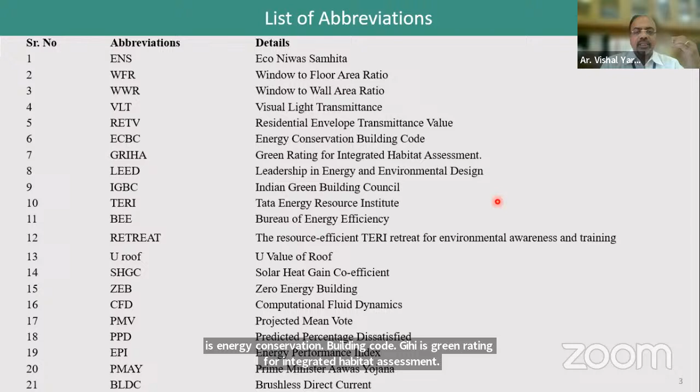ECBC is energy conservation building code. GRIHA is green rating for integrated habitat assessment. LEED is leadership in energy environmental design. IGBC is Indian Green Building Council. TERI is Tata Energy Resource Institute. BEE is Bureau of Energy Efficiency.

I will just read out the most important ones. U roof is basically the U value of the roof, and EPI is Energy Performance Index.

RSE is exterior film resistance. RSI is interior surface film resistance. PF overhang is basically a projection factor related to the overhang. H overhang is the horizontal depth of external shading projection. V overhang is the distance from the bottom of the sill level of the window to the bottom of the weather shed. W stands for windows, D stands for doors, V stands for ventilators, and so on.

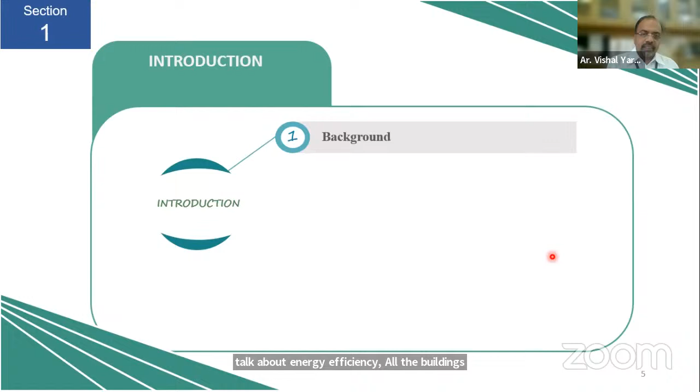Coming to introduction, basically when we talk about energy efficiency, all the buildings designed prior to the invention of concrete in India were energy efficient. But in the process of following Western countries, over a period of a few decades, the issue of energy efficiency was given least priority.

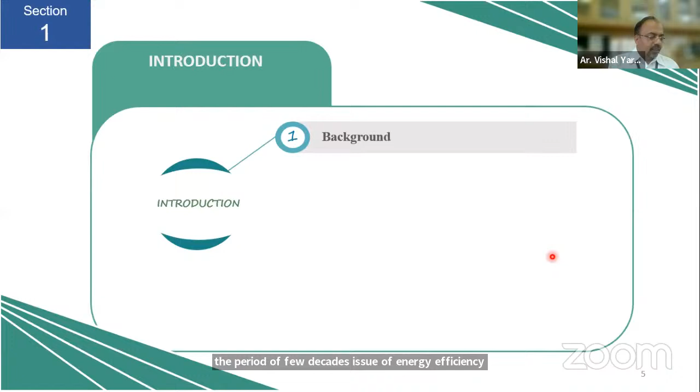The green architecture movement began in the 1980s for single houses and small scale buildings. In 1990, the United Kingdom introduced the world's first green building standard, followed by the US Green Building Council in 1993. After 2000, it was realized that we must address this issue, otherwise future generations will be in trouble. Then systems like GRIHA, LEED, IGBC were developed.

They worked on various working systems, various rating systems for energy efficiency and different kinds of energy audits. TERI has illustrated many principles of energy efficiency through examples. Coming back to the need, the cost of energy is increasing and the energy crisis is an imminent reality.

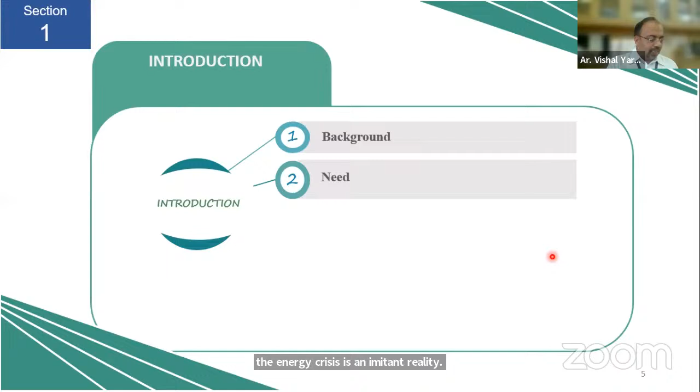So the need to provide energy efficient building designs is very important. You may talk about United Nations Sustainable Goals, Niti Aayog goals, various strategies of government which clearly demonstrate the urgent need of energy efficiency in buildings.

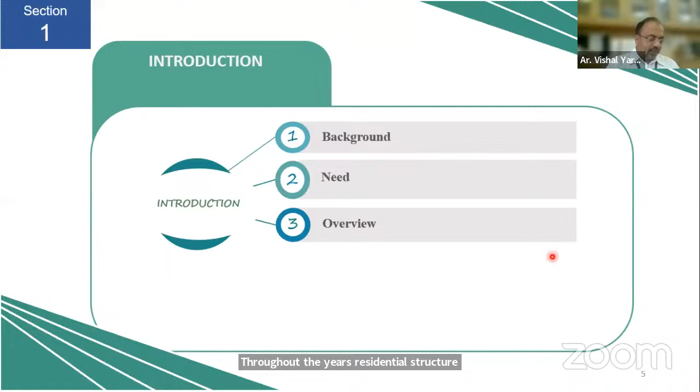Just a brief overview: almost 75% of the energy used in construction goes towards powering homes. Throughout the years, residential structure total power has increased dramatically. For instance, as per Niti Aayog, in 2016-17 consumption was close to 260 terawatt hours, which was more than 55 terawatt hours over the previous year.

In only 20 years, the number has multiplied by 4 times. By 2032, it is predicted to increase between 630 to 940 terawatt hours. The significant rise in domestic power consumption may be traced in part to the rising popularity of using individual air conditioners.

As income rises, the tendency to use air conditioning also increases, which further increases the burden on energy.

About Indore: like many other cities, Indore is also currently facing the challenges of balancing sustainability with infrastructural growth. With increasing development in the sectors of IT, education, and various industries, Indore is one of the fast developing cities, also called mini Mumbai, expecting huge population growth in a few decades, which will create the need for additional residential buildings. Hence, at this stage, it is very essential for Indore to mandate execution of buildings which will require less energy to function.

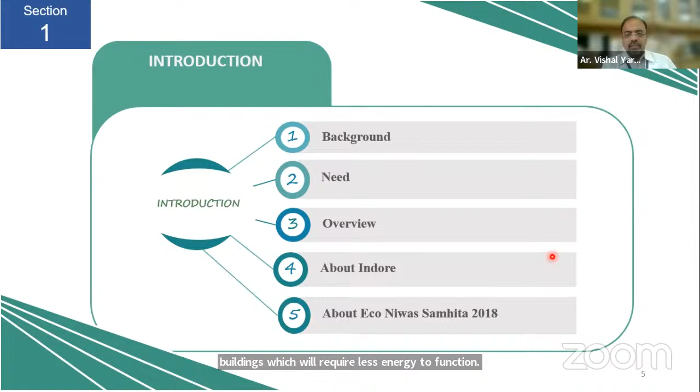About Eco Niwas Samhita 2018: earlier to this code, there were building bylaws, but building bylaws often talk about the height of the building, side margin of the building, and so on. At most, it talks about 10% of the floor area having to be an opening area.

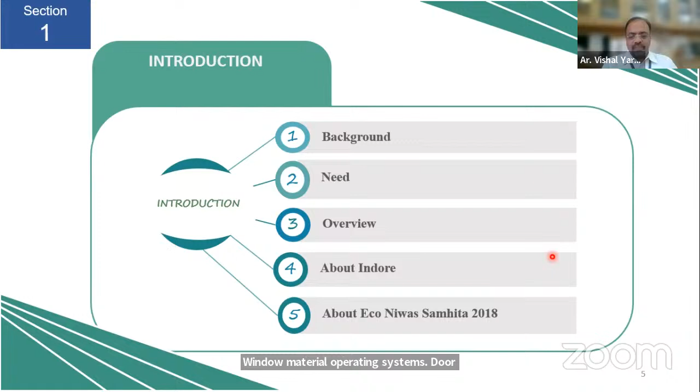But with recent changes in building systems, window systems, window material operating systems, and door operating systems, these codes were actually outdated, and there was a strong need for an energy code, which is Eco Niwas Samhita, introduced in December 2018.

So Eco Niwas Samhita basically takes care of a few important things: it takes care of natural ventilation, it takes care of the daylight potential, and it takes care of the thermal transmission. For example, section 3.1 of the Eco Niwas Samhita explains the openable window to floor area ratio. Again, we will be discussing this term later on in coming slides.

Then the second criteria is visible light transmittance. Third is thermal transmittance of the roof, U roof, and then the RETV, residential envelope transmittance value, and then again the U roof for the cold climate as well. So basically, these three issues are addressed.

Before going to these criteria in detail, let us have a quick review of climate analysis of Indore for the last 100 years. Basically, the climate of Indore is characterized as a composite climate, and it is hot and dry in summer and humid in other seasons. The daytime temperature in the winter is often about 25 degrees centigrade. However, in the night it drops to less than 10 degrees centigrade.

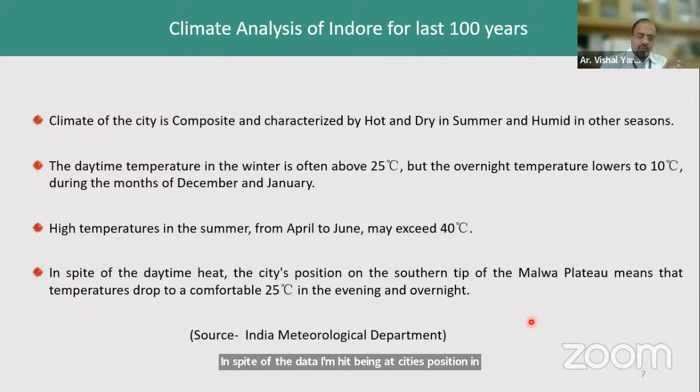High temperatures in the summer from April to June may exceed 40 degrees. In spite of the daytime heat, owing to the city's position on the southern tip of the Malwa Plateau, the temperatures drop to a comfortable 25 degrees centigrade in the evening and in the night. This is the speciality of the Indore climate actually. Even in summer, the nights and evenings are comparatively cooler as compared to the day temperatures.

The interesting part to note here is the maximum temperatures observed were 46 degrees on 31st May 1994 and 45.8 on 3rd June 1991. Minimum temperatures observed were minus 2.8 degrees in 1929 and minus 1.1 in 1935.

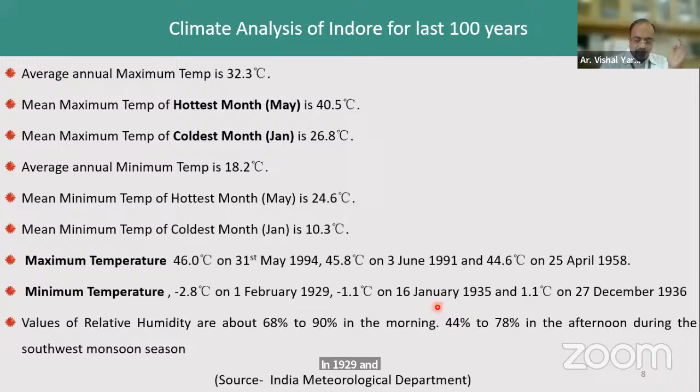I will go through the review of literature very quickly. Basically, while studying this area, very little work was available in the Indian context. Moderate work was available for other countries by foreign authors. But coming to the Madhya Pradesh level, the work available was again reducing. Further zooming to Indore city, there was almost no work on this specific criteria. Thus, in short, there was a great research vacuum.

Research was conducted earlier to understand the size and direction of window openings through CFD analysis. Then the team from CEPT Ahmedabad selected four cities: Ahmedabad, Pune, Mumbai, Delhi. They surveyed 800 homes, covered different climatic zones of India, and created valuable data for these four cities. Then there was some work for the Vijayawada region on the placement of windows and the contribution of windows to energy efficiency.

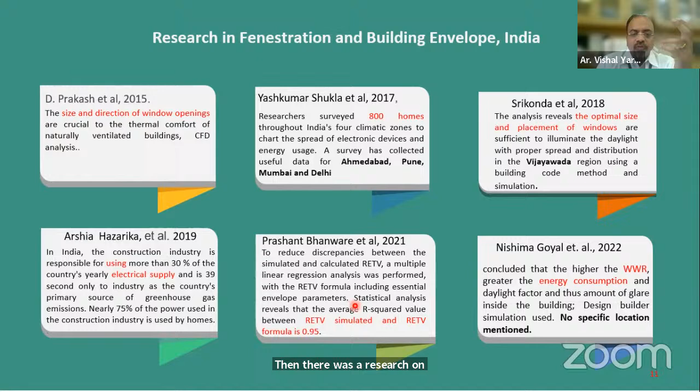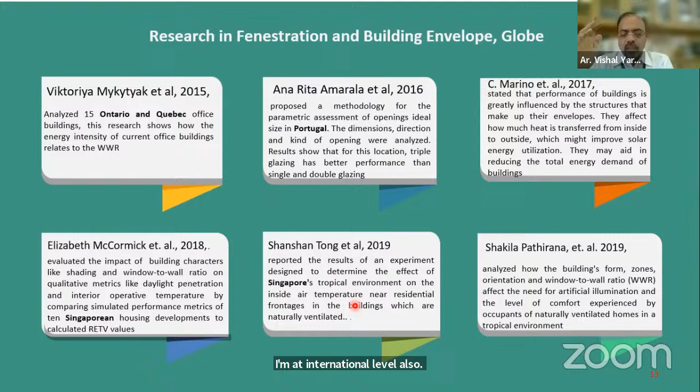There was research on electrical supply and how energy efficiency measures can contribute to reducing actual electricity use. Then there was research on the RETV formula, where the simulation of RETV and the actual manual calculation of RETV were found very close together. At the international level also, there was research on this in Quebec, Portugal, and Singapore, but again the problem was the Indian context, especially Indore and Madhya Pradesh.

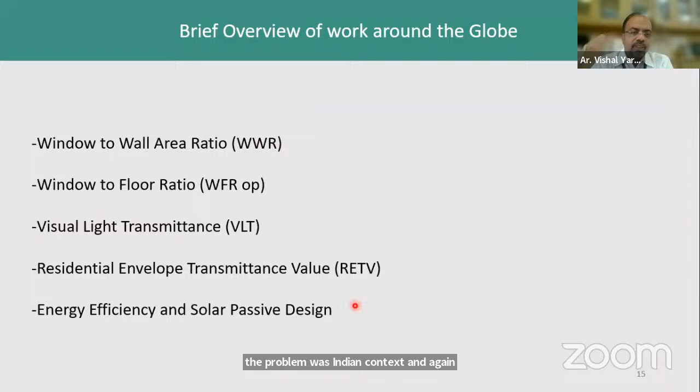So with this, we can identify a research gap: very few comprehensive studies, especially quantitatively evaluating the impact of ENS compliance on building performance with specific reference to Indore. Then the status of solar passive techniques in Indore was not clear. Its correlation with energy performance index, economic implications, and the stakeholders of building construction were not clear.

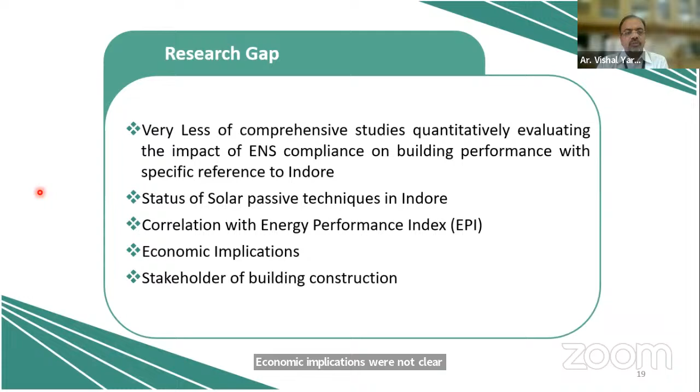So this was the research gap identified, and then we arrived at the problem statement or research questions: what is the current status of solar passive techniques in Indore for residential buildings? Second, do residential buildings of Indore comply with the ENS code, the first energy code of India? If yes, to what extent? If not, how can they comply with it? Third, can solar passive techniques contribute to improving compliance with the ENS code?

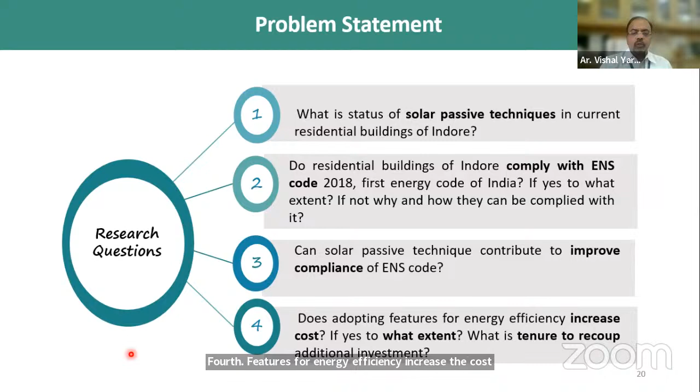Fourth, does adopting features for energy efficiency increase the cost? If yes, to what extent? And what is the tenure to recoup the additional investment? Then the research was conducted with the aim to assess the potential of solar passive techniques with respect to the energy conservation building code for residential buildings in Indore. This was subdivided into these four objectives.

First was to study Eco Niwas Samhita 2018, the energy conservation building code, as a base for analysis of buildings in Indore. Second was to benchmark the existing and new buildings with respect to the energy conservation building code for residential buildings in Indore. Third was to suggest selected solar passive techniques to comply with the code. And the fourth was to work out the cost benefit analysis, energy and carbon footprint reduction.

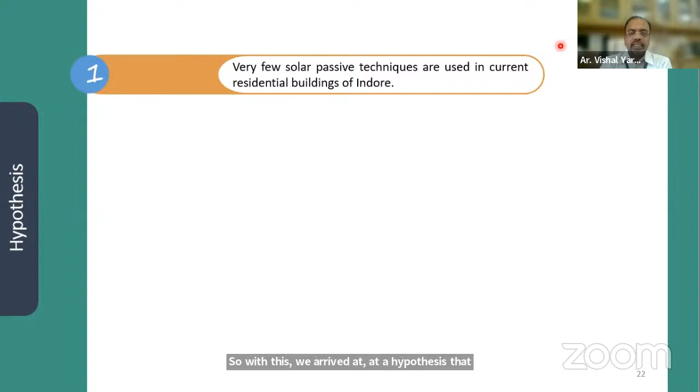So with this, we arrived at a hypothesis that very few solar passive techniques are used in current residential buildings of Indore. Current residential buildings of Indore may be partially complying with ENS Code 2018, and adoption of solar passive features like shading of openings and walls, veranda, internal courts, jali, roof insulation can contribute significantly in achieving the target as per ENS Code 2018. And adoption of solar passive features may increase the cost to some extent, which can be recouped within the span of 5 to 10 years.

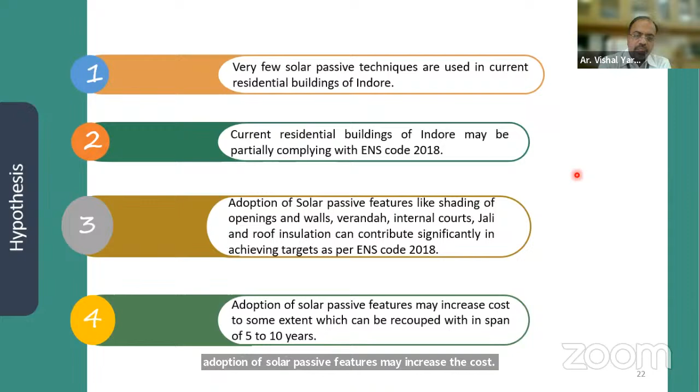Now the scope of the work basically includes the mapping of the shortlisted residential buildings of Indore for the criteria of ENS code, and the limitations: this study is for Indore only. Other types of climate and other places are not considered. This study is with reference to the residential building sector only. Other building types, for example commercial or industrial buildings, were beyond the scope of study.

This study is about the selected sample of 56 buildings. There may be other residential buildings in Indore whose performance may be different than that of the 56 buildings, and the personal habits of electricity usage and electrical equipment were not considered.

Applicability and contributory value: basically, as we discussed in the introduction, Indore is growing rapidly, which is putting tremendous pressure on the housing sector. So this is high time to control the energy use of the buildings to save energy for the future generation. And then the understanding of the energy consumption issues: once we analyze these buildings, we can understand where the issues are, and then reinforce the compulsory energy audit of each and every building in the future.

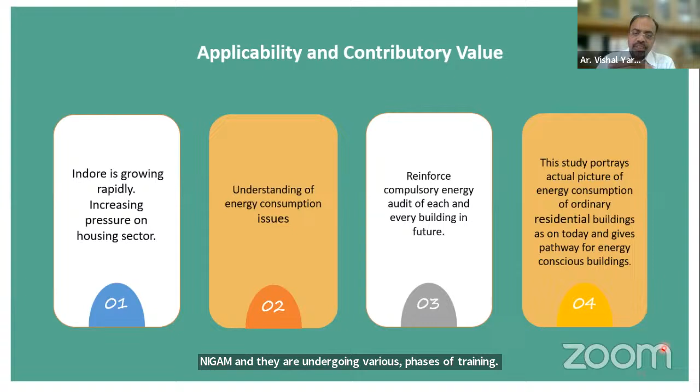See, ENS code is currently at a training stage, and the engineers of the Nigam are undergoing various phases of training. Once that stage is complete within the next 2 to 3 years, the energy audit will be a compulsory process, and each and every proposed residential building has to pass the energy audit. Only then will the building permission be granted. So this is going to have huge importance in coming years.

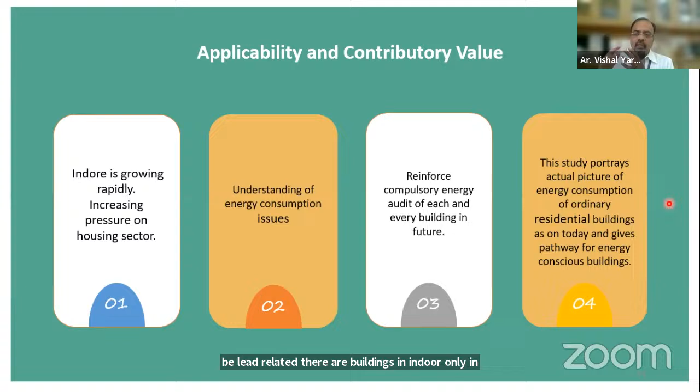This study portrays the actual picture of energy consumption of ordinary residential buildings as of today, and gives a pathway for energy conscious buildings. See, there is a lot of literature available for buildings that are energy rated, for example IGBC rated or LEED rated. There are such buildings in Indore also, but no one is talking about the ordinary building, the common man who is constructing a house, or purchasing a house from a builder, or normal colonies. So the main area of this research was to address these common buildings.

For the methodology, the research philosophy used here is positivism, as it is related to a quantitative study. The research was conducted with a deductive approach, as Eco Niwas Samhita was used as a base to evaluate the performance of the residential buildings. Thus, it is of a confirmatory type. This is because a deductive approach is more suitable when trying to assess whether a theory is applicable within a certain context. So this study adopts a quantitative approach, because confirmatory studies utilize a quantitative approach, which is suitable for it.

The research strategy is case studies, because it is necessary to understand where residential buildings stand with specific reference to ENS code. Hence, visiting the actual constructed buildings or buildings under construction was necessary. The strategy was to visit the shortlisted buildings and study them from the point of view of ENS code. Now the time horizon followed was cross-sectional, as the data was collected in a single visit only. Seasonal visits were not required.

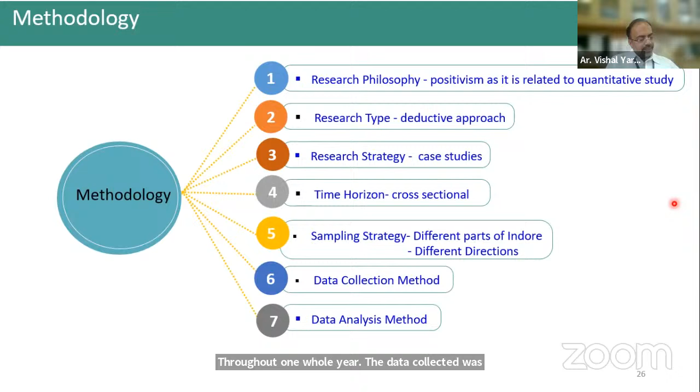For the data related to computation of EPI, electricity bills were collected for the period of June 2020 to May 2021 to get the electricity units consumed throughout one whole year. The data collected was analyzed manually through Excel and different formulas.

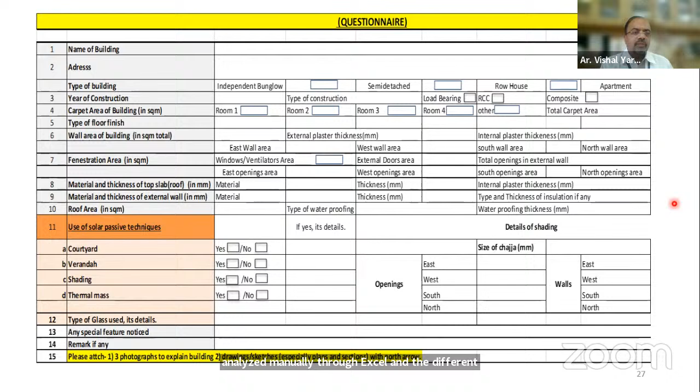This was how data was collected, and it contains various details like the name of the building, the type of the building, which year it was constructed, the carpet area of the building, the floor details, details of the wall assembly, details of the fenestration, windows, ventilators and so on, details of the roof, whether there are any courtyards or shading, any strategy used, and so on.

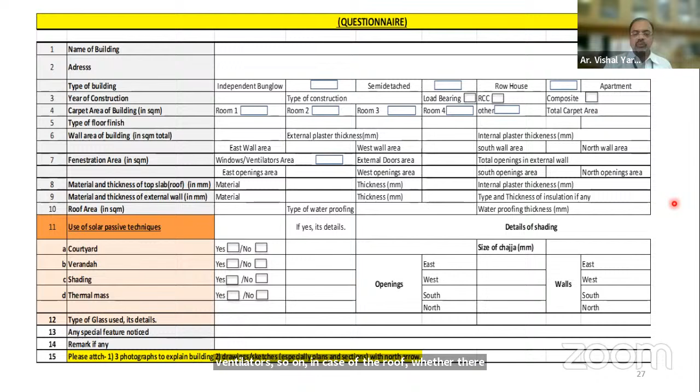Now, going into details of the four criteria which are mentioned in the Eco Niwas Samhita. Basically, window to floor area ratio, as the name suggests, is the ratio of openable area to the carpet area of the dwelling units. Unlike the earlier building bylaws, which were talking about 10% area of the openings only, this code talks about actual openable area.

For example, when we are using aluminum windows, it's not necessary that the whole area is openable. Suppose there are two panels, then only 50% area is openable. That's why there is a provision: if there are two panels, then 50% area is to be counted. If there are three panels in the windows, then 67% of the area is to be counted as openable area. In case of ventilators or doors, 90% of the area of the opening is counted as openable area.

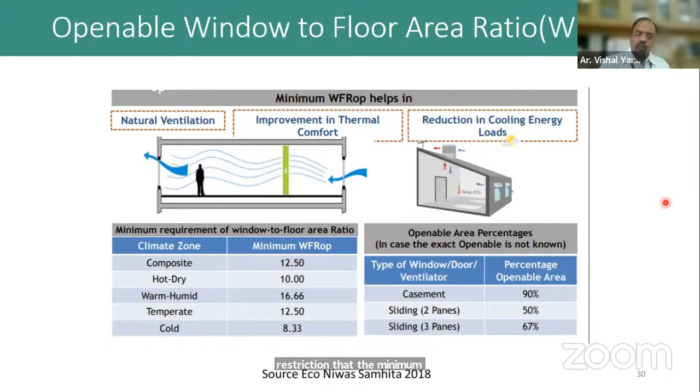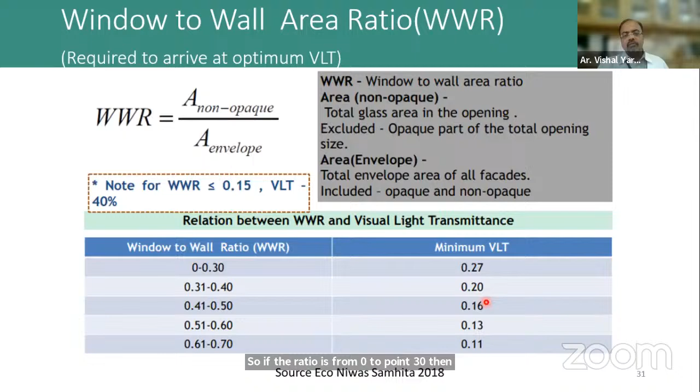Now for composite climate, there is a restriction that the minimum WFR has to be 12.5, so as to ensure proper ventilation in the building. Though the second criteria is VLT, to get the VLT it is necessary to understand WWR, which is window to wall area ratio. As the name suggests, it is the ratio of area of window to the area of wall. That has to be calculated for each and every direction, and then the average taken for all four directions. If the ratio is from 0 to 0.30, then the minimum VLT required, visual light transmittance, is 0.27.

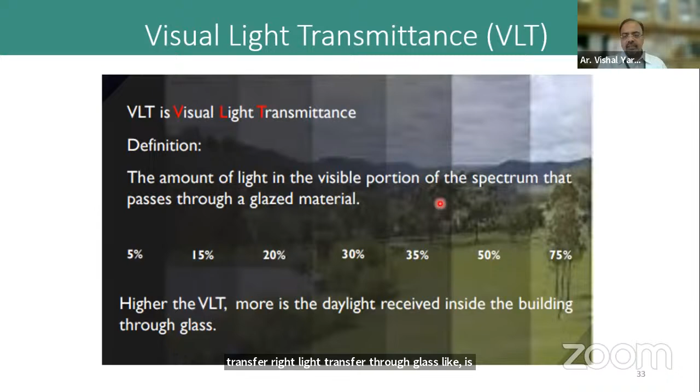That's basically how VLT is obtained from the glass sheet. Basically VLT explains the actual light transfer through glass. The darker the glass, the less light is transferred, and the lighter the glass, the more light can be transferred. So basically it takes care of the daylighting potential. If proper daylighting is used in the design, then the need for artificial lighting is reduced, which again helps in energy efficiency.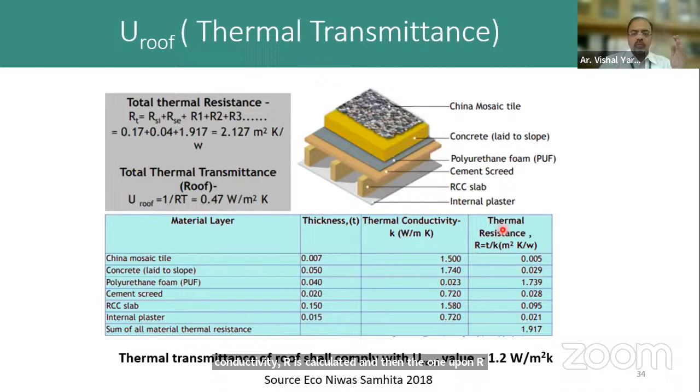The third criteria was U roof, which is the thermal transmittance value of the roof, as the roof is an important portion of the building for heat transfer. Here all the layers of the roof are considered, with their thickness, and the thermal conductivity values are already available. Accordingly, t upon k, thickness upon thermal conductivity, R is calculated, and then 1 upon R is basically the U roof. For U roof, 1.2 is the maximum limit permitted in the code.

Fourth criteria is RETV, basically residential envelope transmittance value. Now, the roof area is already addressed by U roof. Now we are talking about the enclosure of the building. This includes maybe opaque surface, maybe non-opaque surface of the building, and RETV takes care of the various factors.

For example, walling material for the construction, U value of the walls. Then it takes care of window to wall area ratio, then U value of the glass and the shading design, then the SHGC value and the orientation of the wall and opening also. Now RETV is calculated by using this formula. At first sight, this formula does appear complicated, but actually it is not.

This formula is divided into three parts. This first part, called term 1, takes care of heat of conduction, basically heat transferred in the building through conduction. Second part takes care of the heat transferred through conduction, but from the windows. This was from opaque surface, this is from windows, and then this is from the heat of radiation through the windows. These are the constants. Again, their value is given for the composite climate.

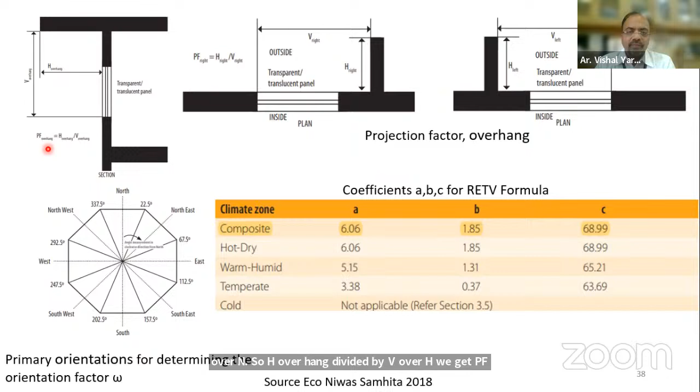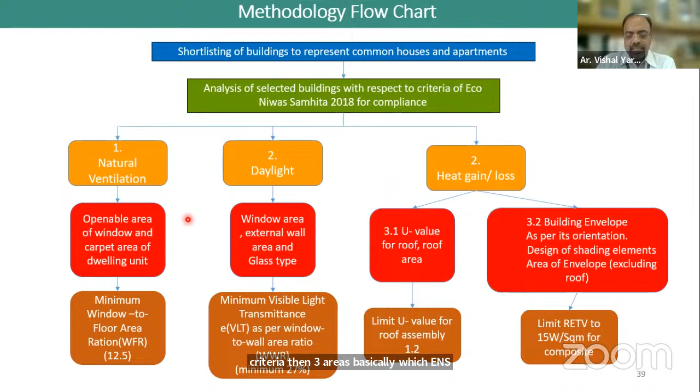That's the methodology part: basically the buildings were shortlisted, then the analysis of these buildings from the point of ENS code, then three areas which ENS code addressed, then the different criterias, and then each building was studied for the separate criterias.

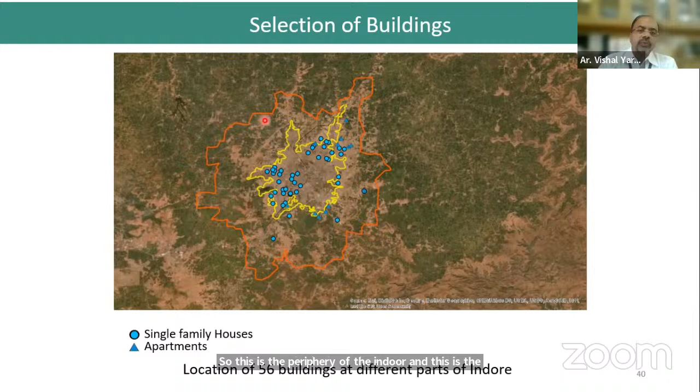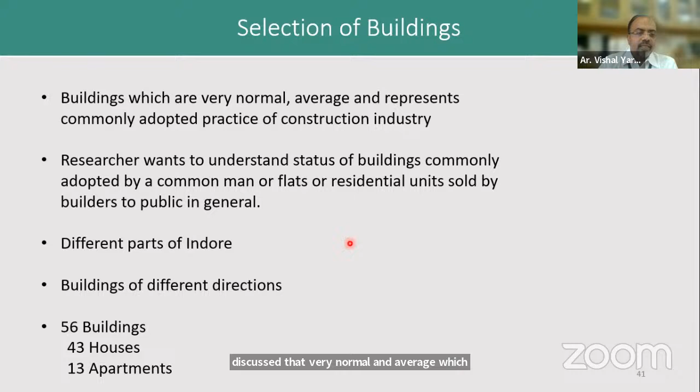This is the location of the 56 buildings. These are the single family houses, and the blue triangles which you are seeing are the apartments, the multi-family housing. This is the periphery of Indore, and this is the modified periphery of Indore as per the new development plan. Selection of buildings, as already discussed, very normal and average, purposely selected from different parts of Indore and of different directions. Most buildings studied were from the period 1990 to 2020.

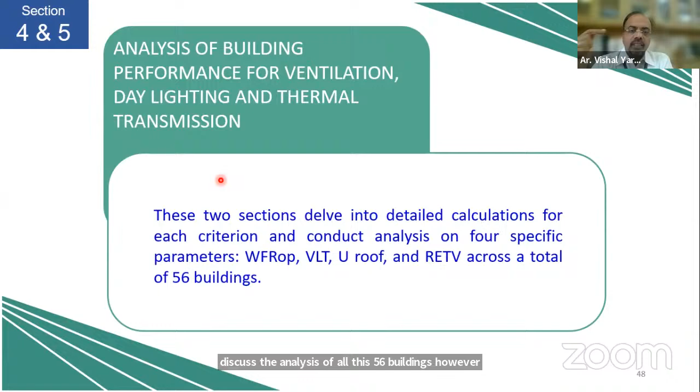Now in this limited time of 40-45 minutes, it is not possible to discuss the analysis of all these 56 buildings. However, we will discuss here one for single family and one for apartment. So this was a typical unit from MP Housing Board at Rau. Then the wall assembly was studied. How is the wall made up? The roof assembly was studied, and then the drawings of the buildings were studied.

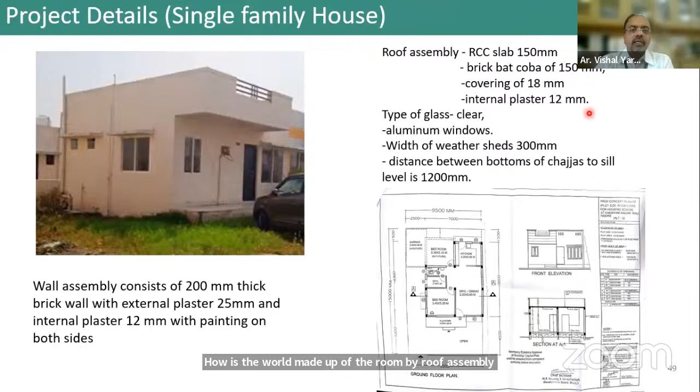This resulted into the first part, which is window to floor area ratio. For that, the dimensions of each and every room were measured, and that's how the total floor area of that particular building was calculated. Then the openings were measured and the opening area was calculated. Again, if there were 2 panels, then 50% area; 3 panels, then 66% area. For ventilators and doors, 90% openable area is considered, and that's how the ratio was obtained here as 18% in this case.

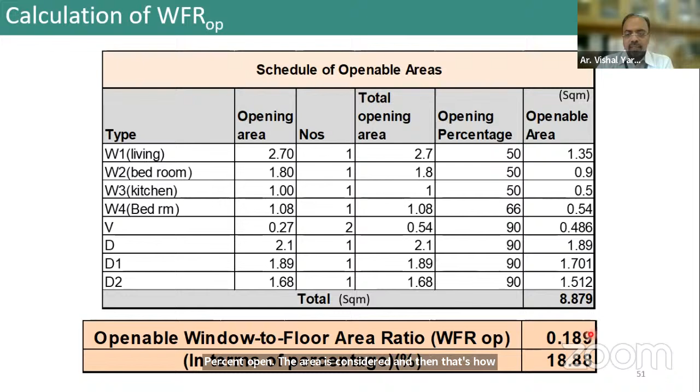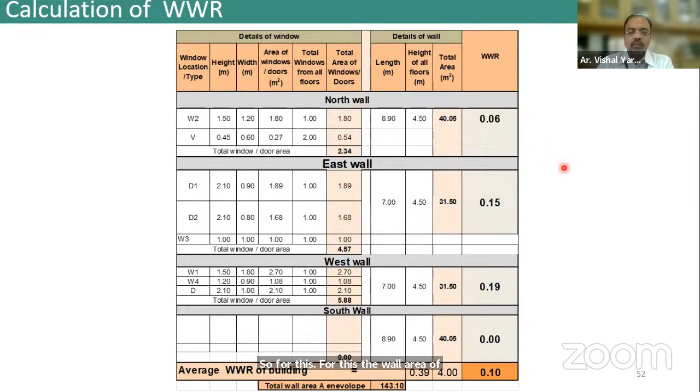Now for VLT, the window to wall area ratio is calculated. For this, the wall area of all 4 sides was calculated, and the window areas of the different sides were calculated. Then the U value of the slab is calculated, considering the different layers, their thickness, then the thermal conductivity, and R is T upon K, and that's how the U value was calculated. Similarly, the U value was calculated for the wall. This is directly used in the RETV calculations.

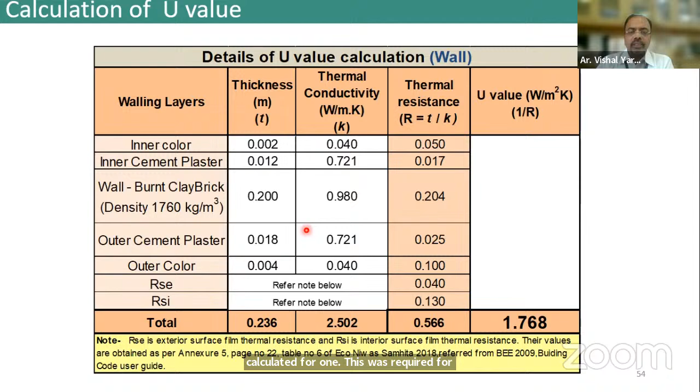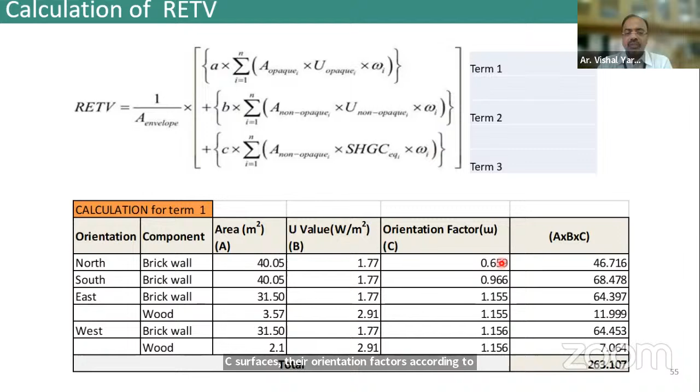Then the next criteria, RETV calculation. Again, as discussed, the 3-term RETV formula, and this is the calculation for term one. Term one basically deals with the heat of conduction through opaque surfaces. So here are the areas of opaque surfaces, the U value of the opaque surfaces, their orientation factors according to their direction, and then the calculation for term one.

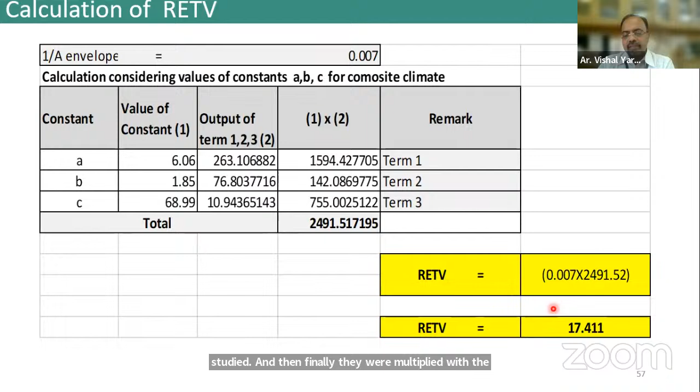Here is the calculation for term 2, which is non-opaque surfaces, commonly windows. Then the sizes and areas of the windows, the U value of the glass used in that particular window, and the orientation factor depending upon the direction of the window. Then PF overhang is calculated, and accordingly the SHGC was calculated. Term 3 deals with the heat of radiation through windows, so to calculate that, the details of the weather shades and chajjas were studied. Finally they were multiplied with the ABC constants, and the RETV calculated in this case was 17.4.

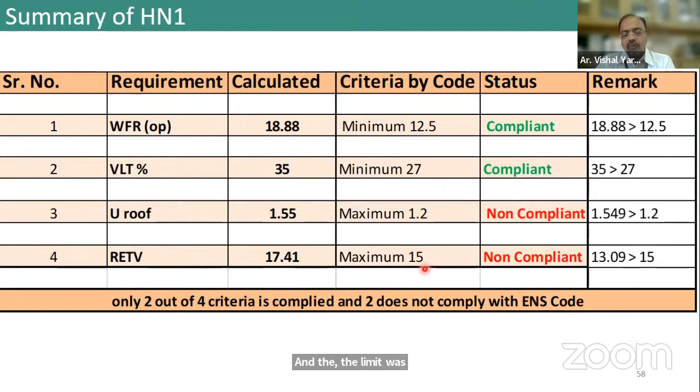Now this is the summary of this particular project. WFR is compliant: the minimum has to be 12.5, and in this case it was 18. VLT minimum has to be 27; in this case it was 35. But two criteria were not complying, because the U roof maximum limit is 1.2, whereas the one calculated for this was 1.55. And for RETV the limit was 15, and the calculated value here was 17. So two criteria were compliant and two were not compliant for this particular case.

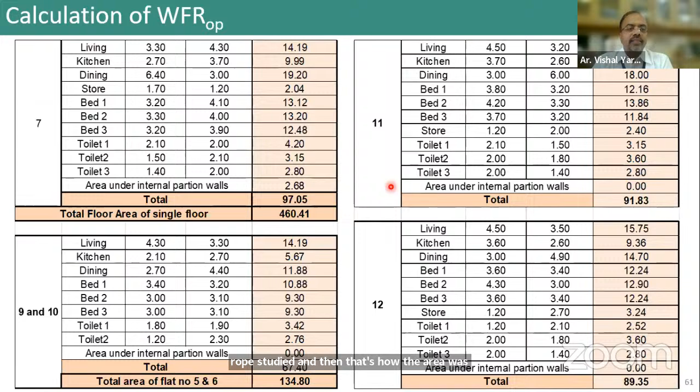Coming to the apartment. This was an apartment with 16 flats on each floor. Again the wall assembly was studied, the roof assembly, different sections and layers of the roof, and then the area was calculated. Flat numbers 1 and 2, 3 and 4, 5 and 6, then 7 and 8 were on the previous slide, and that's how the area of all 16 flats was calculated and the total area arrived at. Similarly, the openings were calculated for each direction, and the window to floor area ratio was calculated.

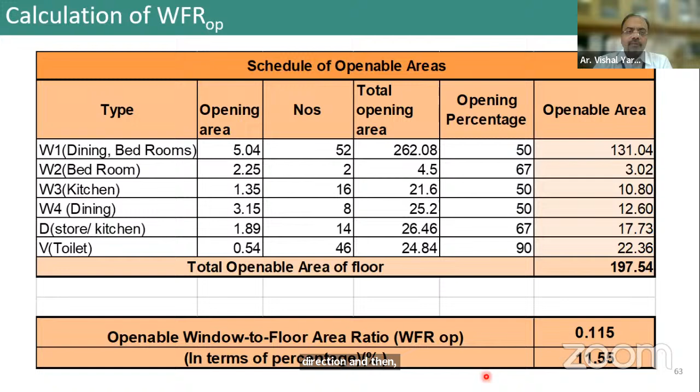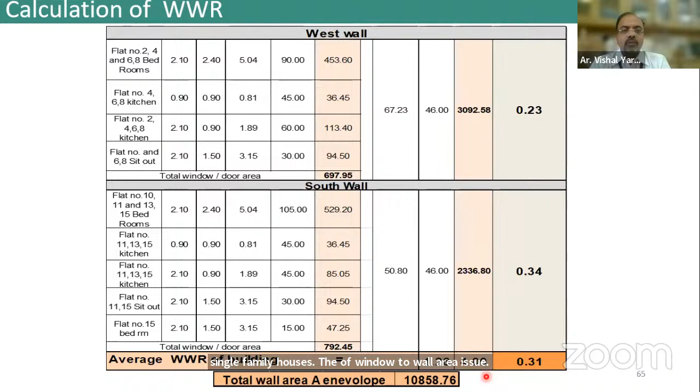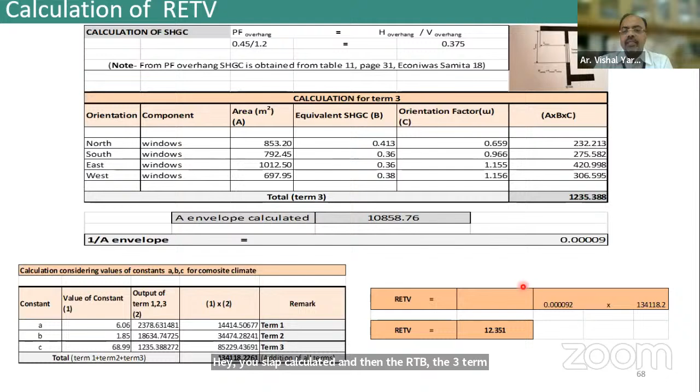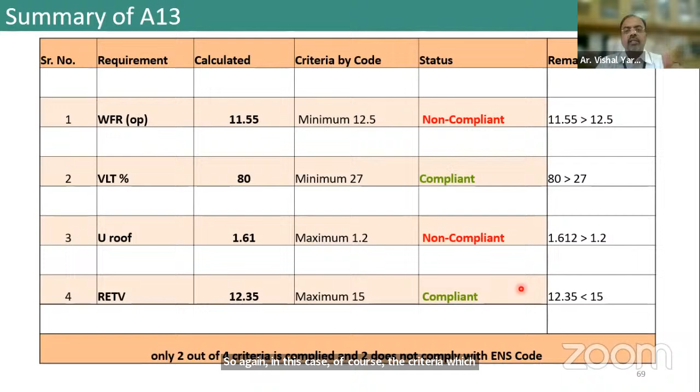After that, the same process we discussed for the single family houses: the calculation of window to wall area ratio, the wall sizes and window sizes for all directions, and their calculations, and then A envelope, because this is required in RETV calculations. Similarly, U slab was calculated, and then the three-term RETV, with calculations for term 1, term 2 and term 3. In this case the RETV calculated was 12.35, which is very much within range. So again, the criteria complying are different, but again two criteria are complying and two are not complying.

After this, a similar process was repeated for the rest of the buildings. The next part was to calculate the energy performance index. To calculate this, we collected the electricity bills for the period of June 2020 to May 2021. Of course, for buildings under construction it was not possible to get the electricity bills, but for the buildings which were occupied, we were able to collect the bills and calculate the EPI. Basically, EPI is the units consumed throughout the year divided by the built-up area of the building, and the EPI ranged from almost 5 to 60. A huge range was observed.

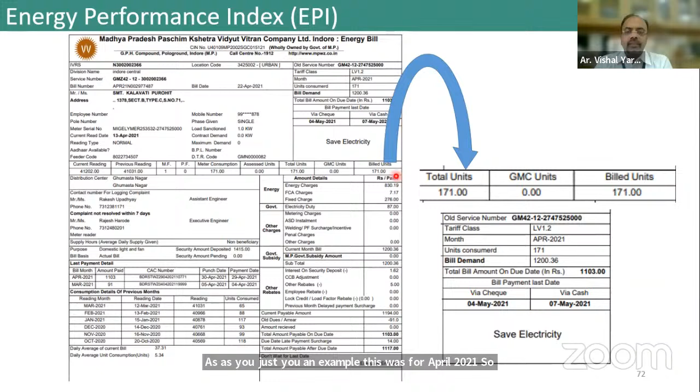To give an example, this was for April 2021. In the electricity bill there is a column for bill units; those units are used for the calculation of EPI. This is the total of the 12 months, divided by the area of the building, and the EPI in this case was 15.

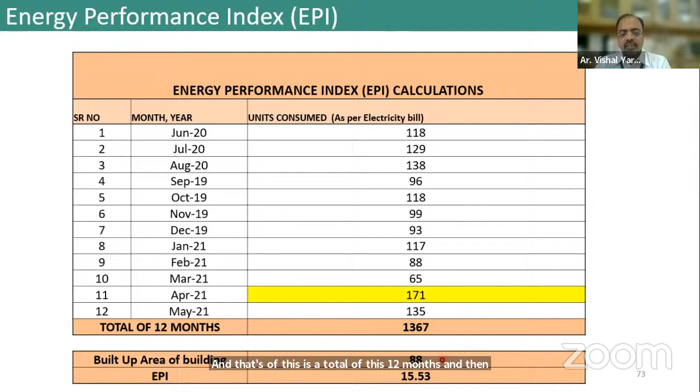This was the month-wise segregation for this particular building for the EPI. Now coming back to results and discussions, the first research question was...

What is the status of solar passive techniques in Indore currently? There are internal courts and ducts commonly used in buildings, especially single family houses, and these courts contribute to increasing natural light and improving ventilation of the building.

Then shading through balconies - knowingly or unknowingly, balconies are planned and they help cast shadows on the wall below, which helps in energy efficiency. Especially for single family houses, one-sided exposure is used, which again helps in energy efficiency. For example, a building packed from three sides, closed by three sides, having access from only one side of the road.

Second research question was: do residential buildings of Indore comply with ENS code 2018, which is the first energy code? If yes, to what extent, and if not, how can they be complied with.

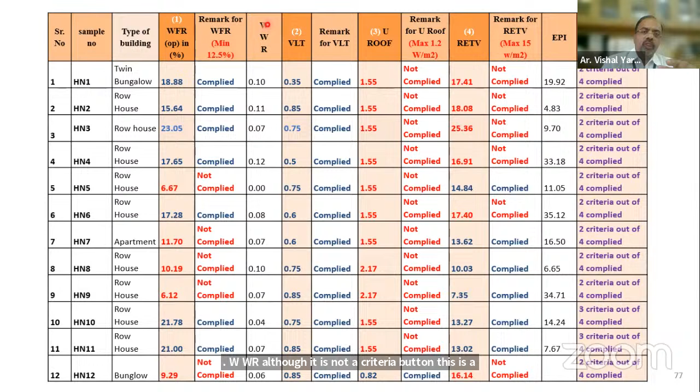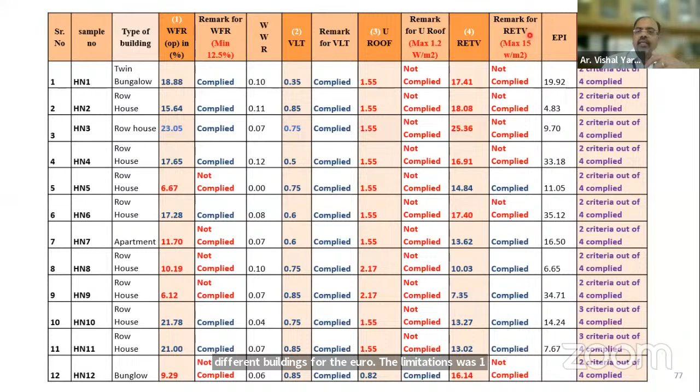WWR, although not a criteria itself, is a mandatory requirement for VLT since VLT is dependent on WWR, hence WWR is also mentioned. The second criteria is VLT with its values. Third criteria is U-roof, with different values for different buildings - the limitation was 1.2, with remarks on compliance. The fourth criteria is RETV, with its remark, then the EPI, and the overall remark. That's how the summary sheet works, 12 buildings per slide.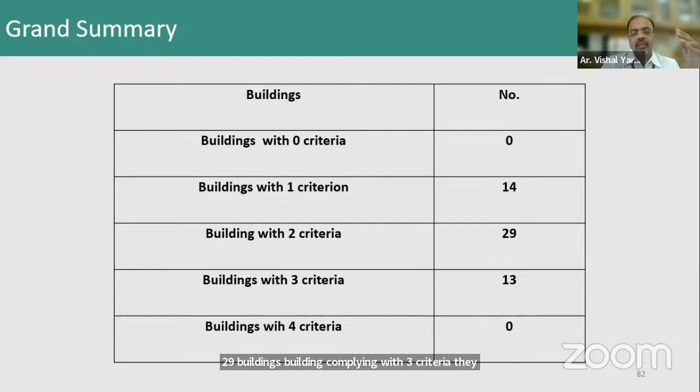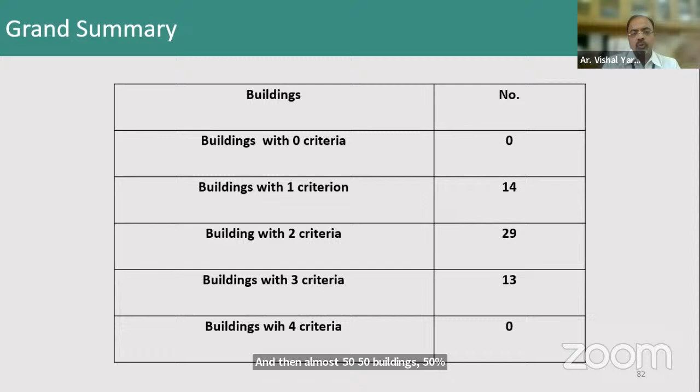Buildings complying with only one criterion: 14 buildings. Buildings complying with 2 criteria: 29 buildings. Buildings complying with 3 criteria: 13 buildings. We did not find any building complying with all 4 criteria. So roughly 0% for zero criteria, 0% for four criteria, and then almost 50% for 2 criteria, 25% for 1 criteria, and 25% for 3 criteria.

Third question was: can solar passive techniques contribute to improving compliance of the ENS code? The answer was yes - through roof insulation, wall insulation, and optimum window sizes. If window sizes are less than required, light conditions will suffer and artificial light will be needed.

Again, these buildings will not be energy efficient. If window sizes are more than required, the RETV value will increase, heat gain will increase, and air conditioning will be required to control that heat. So optimum window sizes are essential, and the type of glass used also plays an important role.

Addressing research question 4: does adopting solar passive features increase the cost, and if yes, to what extent? Yes, it was observed that adopting these features may increase cost by 5% to 25%, but this has to be treated as an initial investment because it results in reduced energy consumption, which further results in very low maintenance cost.

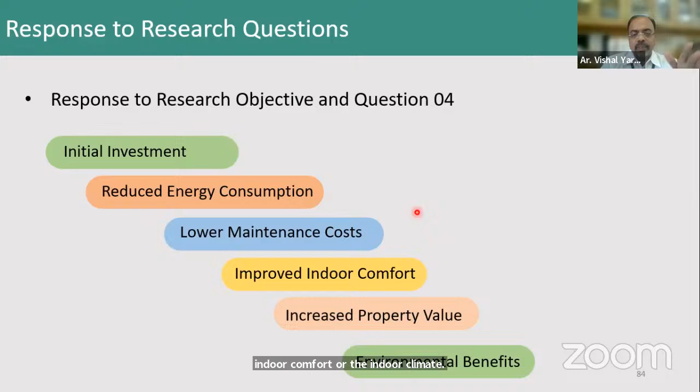There is also a drastic improvement in indoor comfort or indoor climate, and that increases the property value. Apart from all these financial benefits, we are also contributing to the environment.

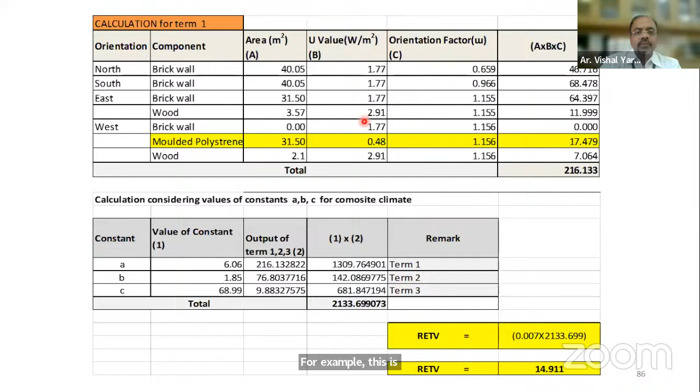Now there are some recommendations, because few criteria were complied with and few were not, so there was an exercise on what to do for the criteria which were not compliant. For example, for one particular building the RETV was going beyond the limit. A simple solution on the west side - molded polystyrene was applied, and when that was applied, RETV, which was around 18, reduced to 14.9.

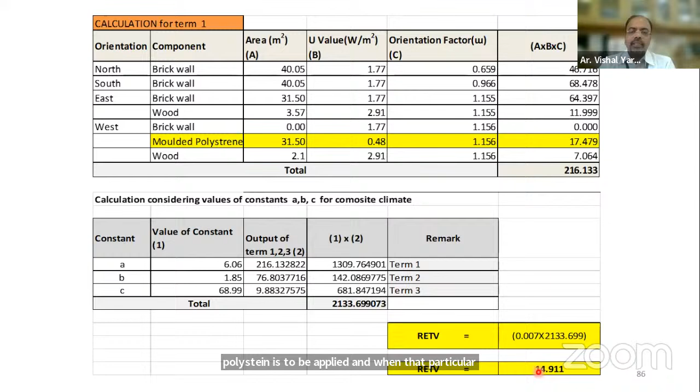Another application where the U-roof was going beyond limit. So one layer was applied in the slab, and then that U-roof was within limit. There was also a calculation in terms of cost, for example how much cost will increase in percentage, and the approximate period to recoup the investment in years. That increased cost was around 5%, and the payback period was around 11 years.

Again, to calculate the period to recoup the investment, there is a gradual increment in electricity bills. After 2-3 years there is an increment. That increment factor is not considered here, so that figure will reduce further.

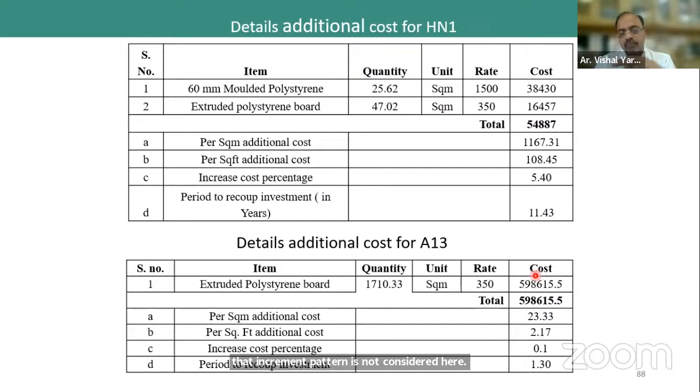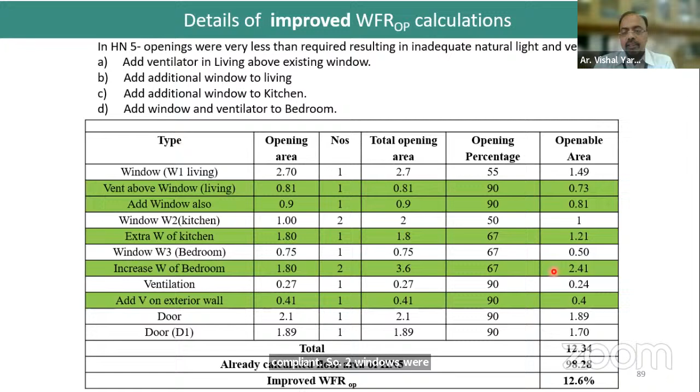Another case where WFR was not complying. So a few windows were added, a few ventilators were added, and then that criteria of WFR was complied with. Again that was calculated in terms of percentage, and this result was obtained.

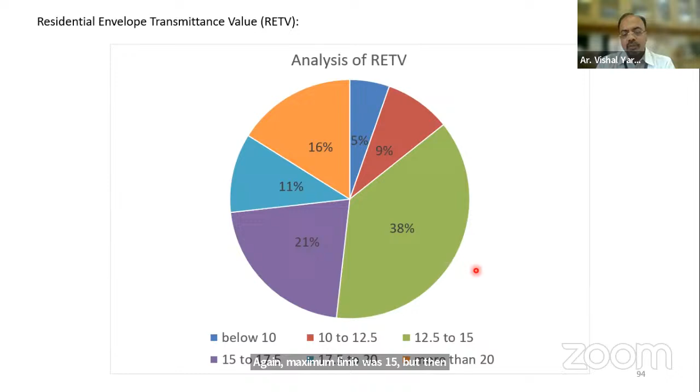So just a graphical analysis of all the buildings. This is an analysis of RETV. Again, the maximum limit was 15, but it was analyzed into different parts, and this is how the analysis of RETV looks.

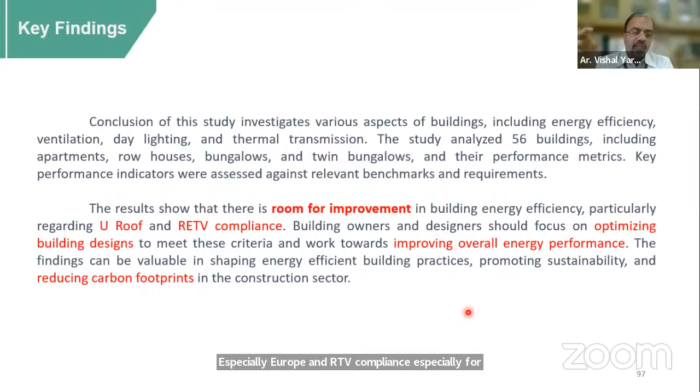So that's how, for the comparison of the overall criteria across all four criteria, this research resulted in finding that there is considerable room for improvement, especially in U Roof and RETV compliance. For almost 98% of the buildings, U Roof was not complied, because a simple 4 inch slab or 6 inch slab with brick bat coba or a layer of tiles is not solving the purpose of the limit prescribed in the code.

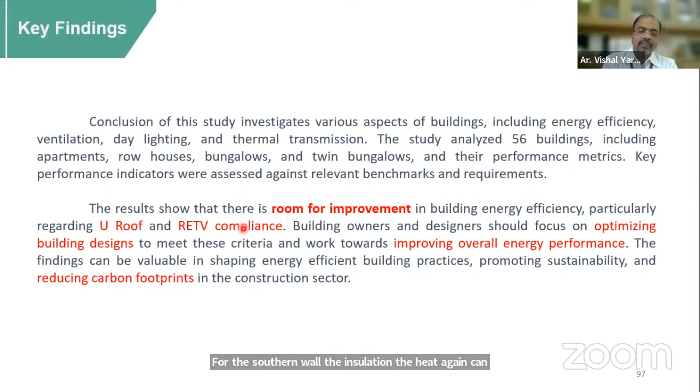The RETV issues were observed because of non-insulation on the west side wall. For the southern wall, the heat gain can be taken care of through weather shade design or cantilever design, but for the west side, insulation of the west side walls is required.

So basically the key findings are that the fenestration, the openings, the windows, maybe ventilators, maybe doors, are to be very precisely calculated. It's not an after-design afterthought, not a 10-15 minute job of placing window openings in the design. They are to be calculated as per these four criteria.

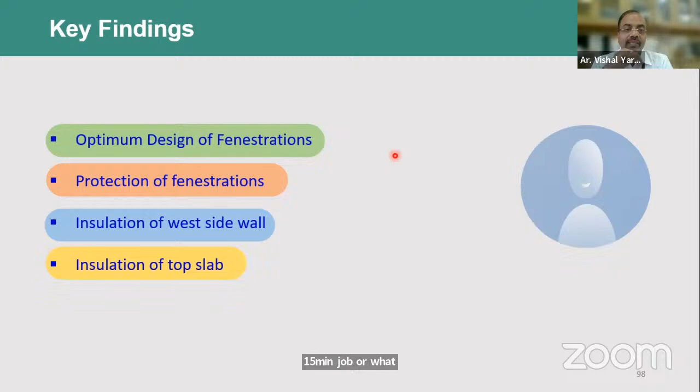Then the protection of the fenestrations - whenever openings are there, they have to be protected with proper weather shades, insulation of the west side wall, and insulation of the top slab. These are the major factors necessary to address.

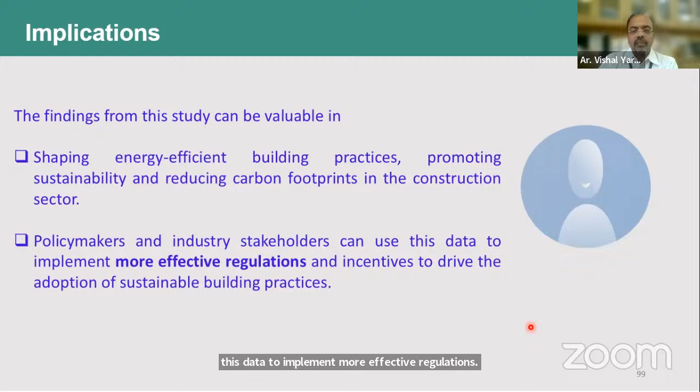This study is valuable in shaping energy efficient building practices, promoting sustainability, and reducing carbon footprints in the construction sector. Policymakers and industry stakeholders can use this data to implement more effective regulations and incentives to drive the adoption of sustainable building practices.

Scope for further research, future research: in this case only 56 buildings were studied. Many more buildings can be explored. Other cities and other climatic zones can be explored.

More research on insulation of the west side wall and insulation of the top slab - there are huge opportunities for that. Future research can include the number of occupants, their electrical fixtures, personal habits, lifestyle, etc.

Compliance of the ENS code with reference to IGBC and GRIHA accredited buildings can also be another interesting topic for future research. Then, buildings which are rated 3-star or 4-star and considered energy efficient - are they complying with the ENS code or not? That can be seen, along with other building types.

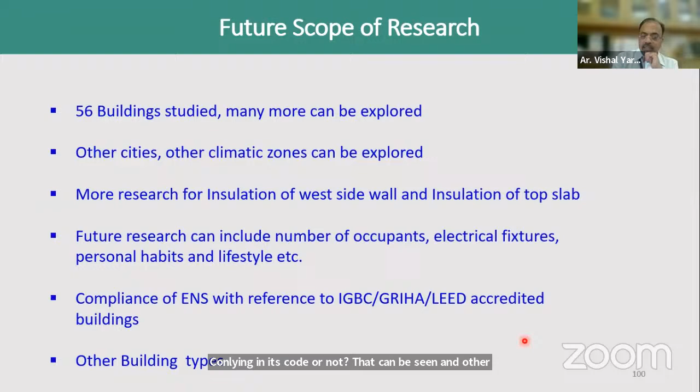Here only residential buildings were discussed. Other building types can also be studied.